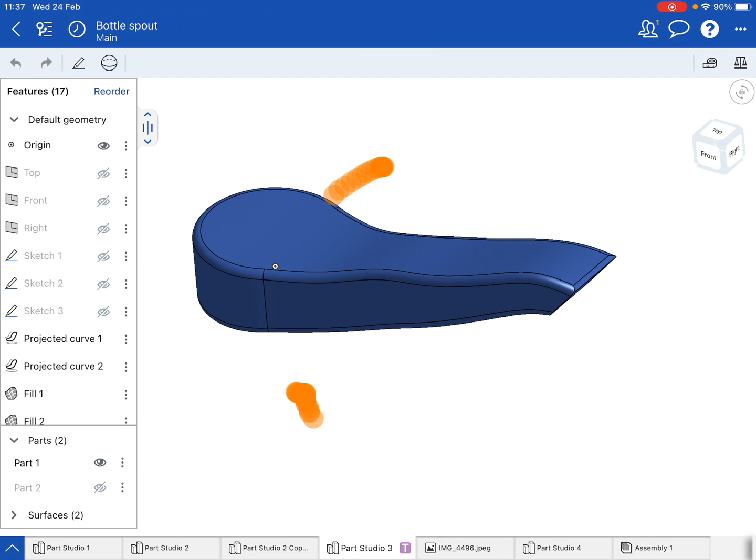For this recording, I want to look at how we can make a bottle spout using Onshape on an iPad. The method is slightly different to doing it on a PC, but hopefully it will work for us. It's going to involve projected curves, the fill tool, shelling, lofting, and hopefully a split as well, which sounds really exciting. So let's get started.

I'm basing the design on a bottle spout like this, the kind you'd see on a soap dispenser. So without further ado, let's start a new part studio for this.

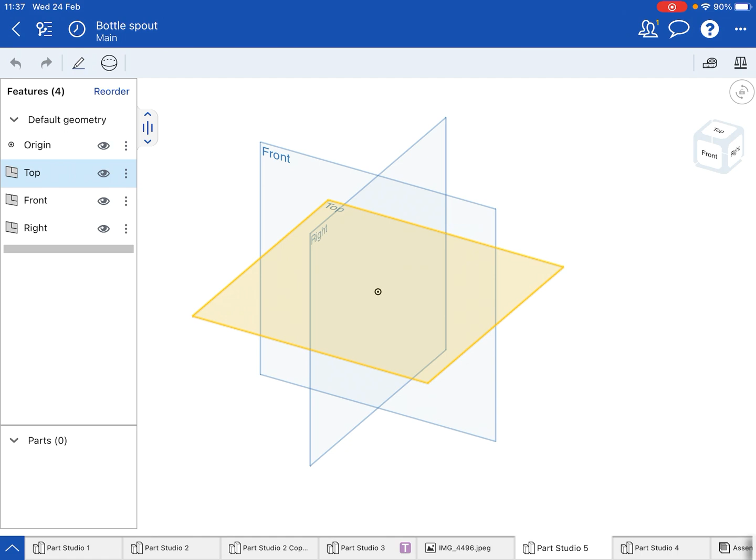I'm going to be drawing on the top work plane, so I'll select that, swing it around so I have it ready, and start a sketch on that work plane. I'll start off with a center point circle, starting from the origin, so I move my cross to the origin and drag the circle out about 25 millimeters.

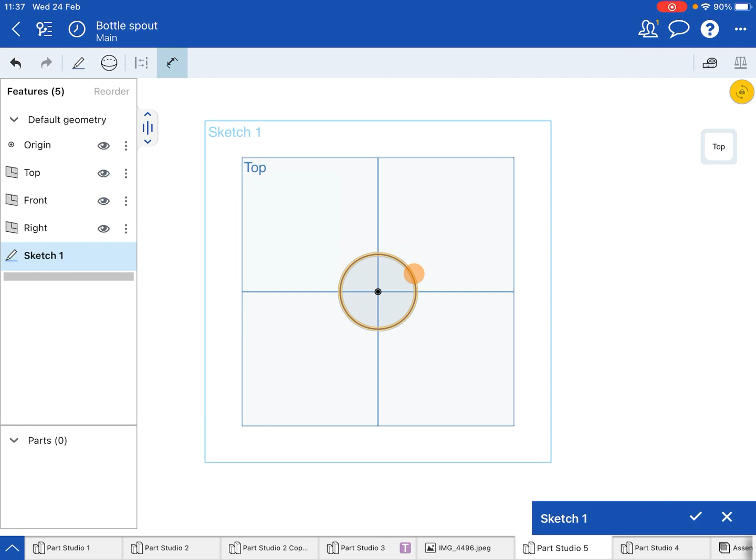Now, unlike the PC, you don't get the dimensions straight away, so you need to dimension it first. We can see this is on 41, we'll just change this to 25, and there we have it, and we can zoom in.

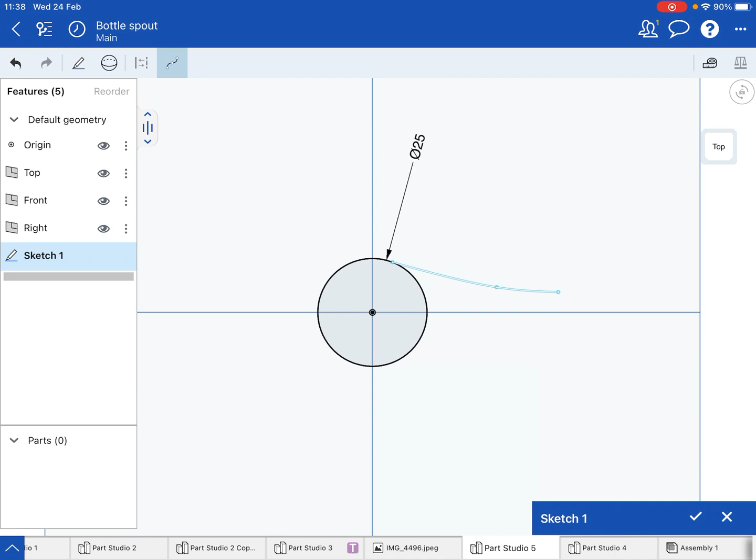Next, I need to get the spline tool. Now this is tricky, you need to start it from the edge of the circle. So I'm going to move my plus sign so I'm actually on the edge of the circle, so it's tangent, and then move to where I want the next point to be, and keep clicking until I get to the points there. You can go back and edit these, remember, but that's fine. Then when you finish, just deselect the spline tool.

If you want to edit this, I'd advise locking the screen first. I'd probably hide the work planes because they tend to interfere, so I'm just going to hide my work planes, then move my finger onto here and hold down until I get a cross sign. I can move onto a point, and then drag and move that point to where I want it. So hold down your finger, get the cross, get that selected, and you can move that point around on the screen. Right, let's double click to deselect that.

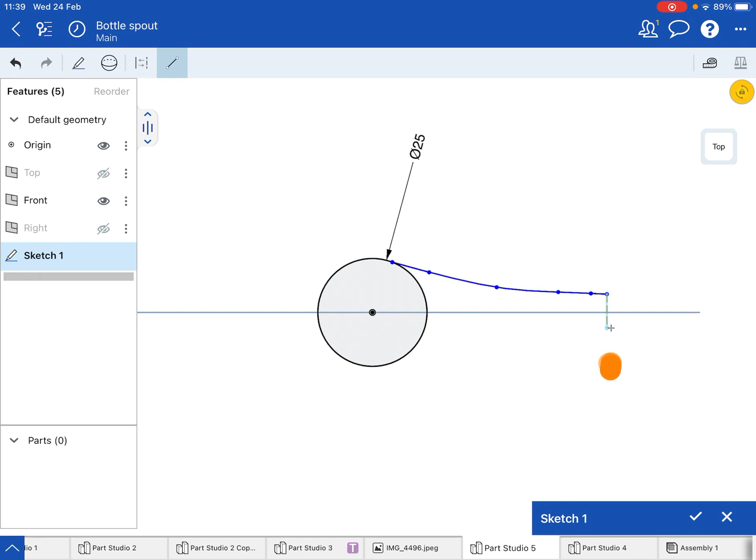I'm then going to put back my work planes just so I can see that again, because I need to see the center line here for the next part. I'm going to choose my line drawing tool, starting from the end of that part, and then drag that down to the edge of the front work plane that you can see there. So that's my drawing drawn out.

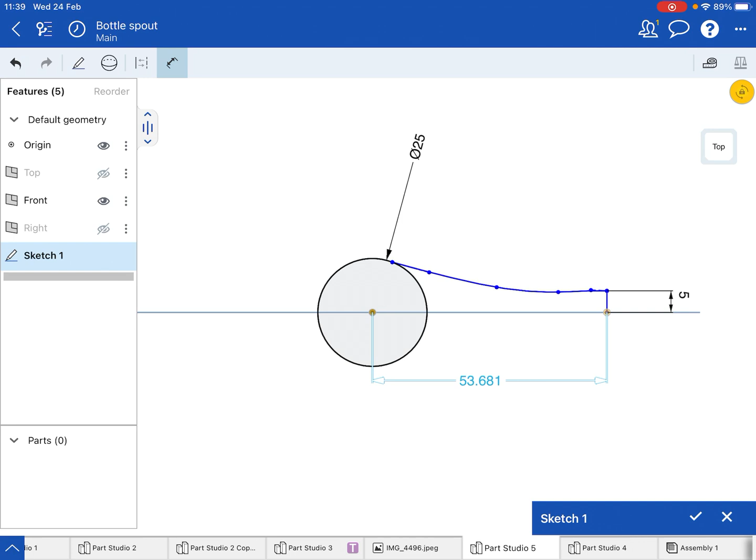Let's dimension this, so I'll take my dimension tool. I'm going to start with this end line here, that's right, and we'll make this 5 mil. We'll also do the dimension from this point to this point, drag that down, and make this 50 millimeters there, perfect. So we've got tangent happening from the circle, a line hanging out from it, and a 5 mil part there.

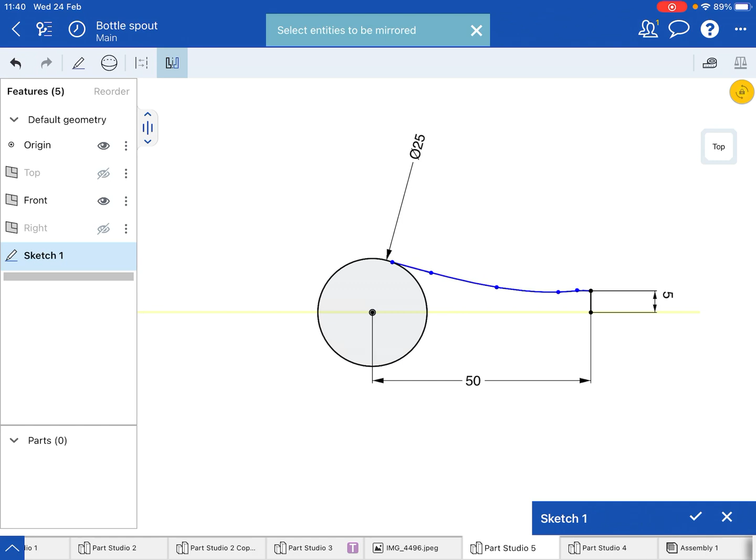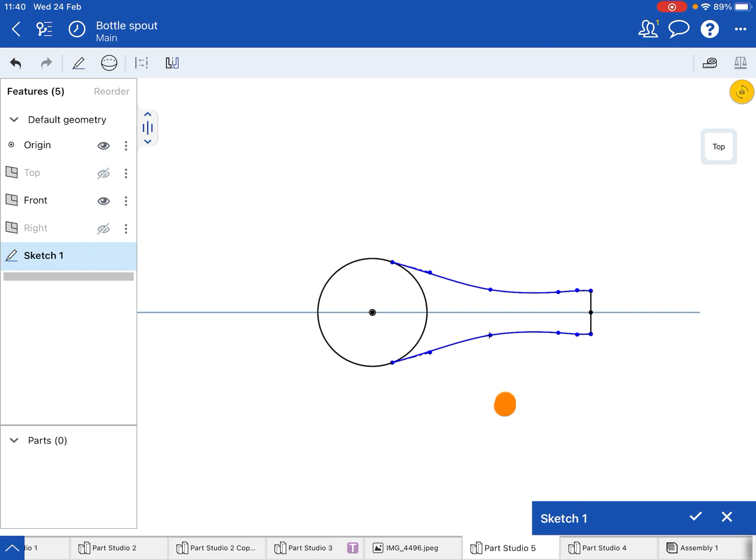Next, I'm going to use the mirror tool. I'll use the edge of the front plane as my mirror line, then select the entities to mirror, which is the spline I drew first, and the end piece as well. Now it's a complete shape because it's gone all grey for me. The reason the mirror tool is really handy is that you can pick up any point on this and move it around, and it will mirror across, so we can keep everything symmetrical on our shape, which is quite cool, as we try to design this.

Okay, so I'm happy with that sketch. One thing I'll do first is take the point tool and put a point on the end of that circle, the edge of the circle, and also on this edge here. This will enable me to see this when I'm looking at it from the front plane - those two points show me the extremities of my drawing.

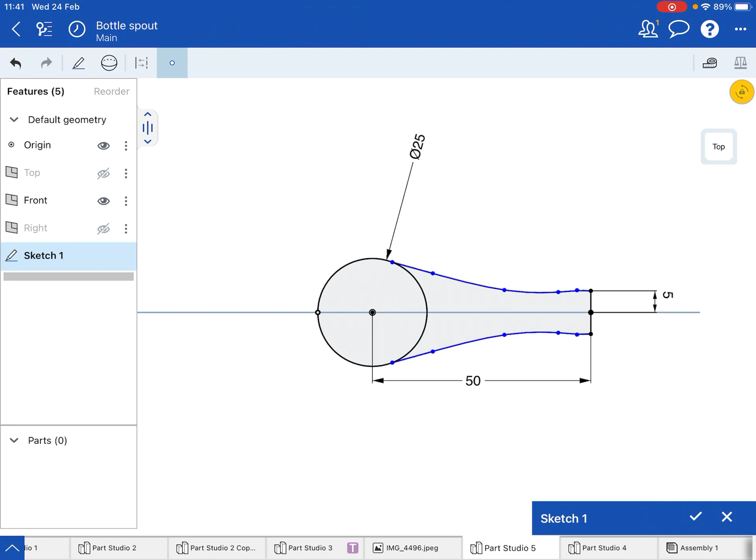I'm also going to take my trim tool and just trim the edge of that circle because I don't need that part now for my shape. That'll do nicely. Let's tick the sketch so we can see my shape nicely drawn out there.

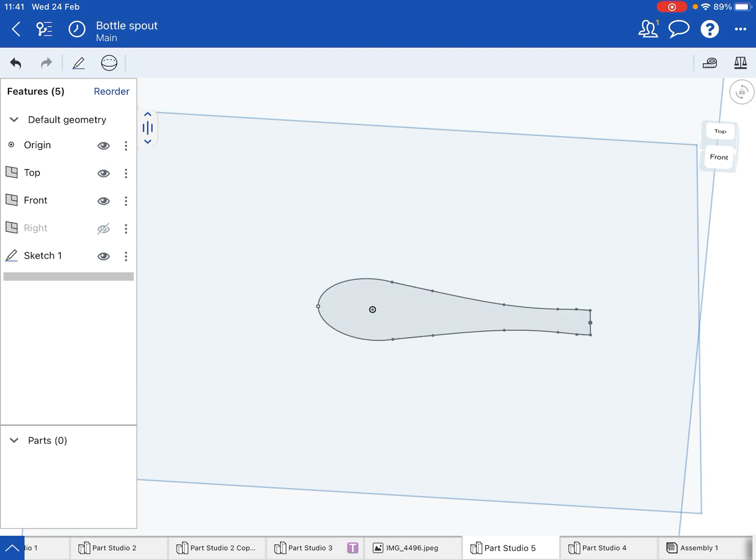I'm going to switch back on the edge of my top plane so I can see it, and then do a new sketch. This time it's going to be on the front work plane. Just double check - yes, it is on the front work plane. We'll swing this so we are looking at the front plane there. Brilliant.

So what we're going to be doing this time is drawing the spline the spout is going to be based on. I'm going to hide my front plane so it doesn't interfere, but I still want to see the edge of my top plane because this is going to be used as a reference. So choose my spline tool, and this is to draw the profile at the top of the spout.

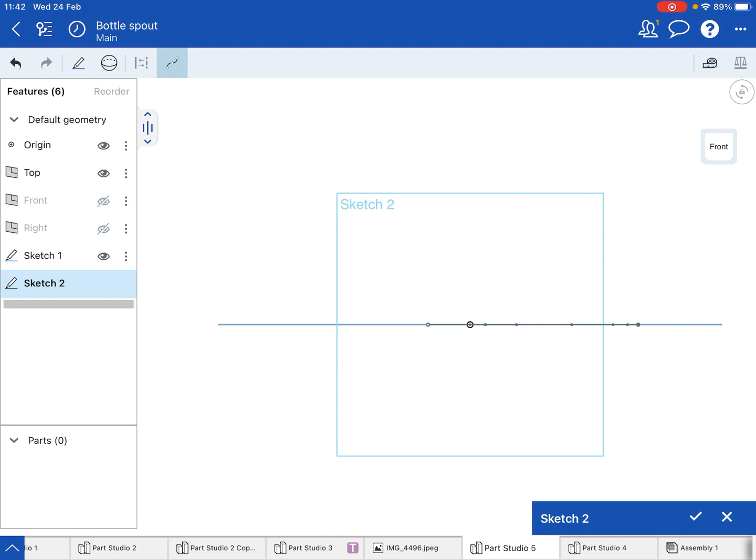So this is going to be a circular part, and then there'll be the edge of it. I'm going to start by just taking this up here. Now I'm going to start from here, but drag up so I can actually get the edge of that there, and then start to plot the edge of my curve that I want to go upwards.

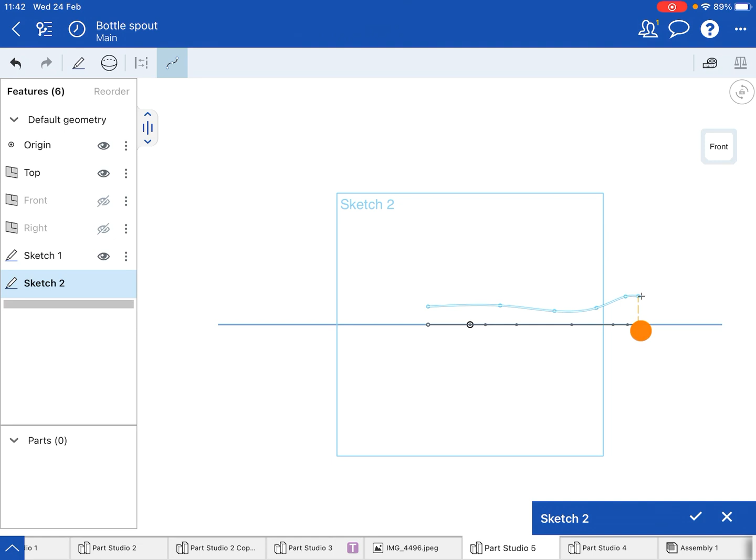When I get to the end of this, I'm going to take this so it hovers over that edge there, but then drag it up so I end up with the edge of it here. Bearing in mind I can move each of these points later on as well, so I know they are vertical with the edge of my shape there. I could draw a construction line to help this as well, but this will work for the minute.

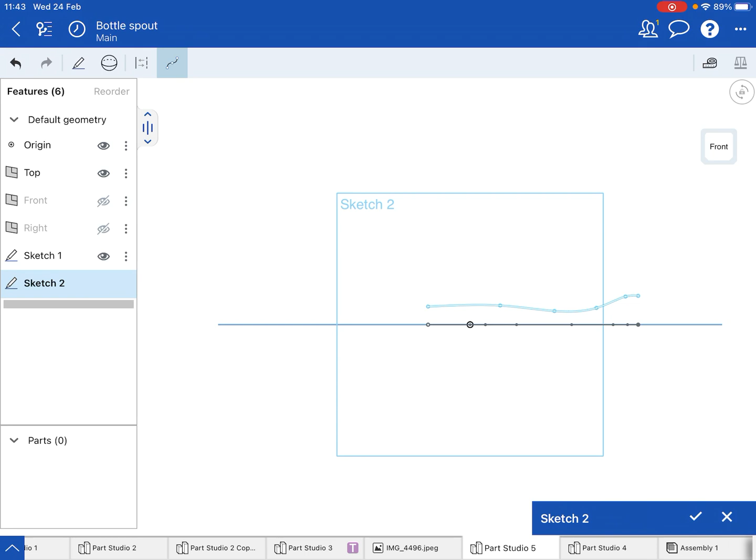I'm happy with the position of that spline, but I'm going to change some of the points. I've deselected the spline tool and I'm going to lock the screen, hold my finger here until I get the crosshairs, pick up this point here, for example, and just drag that up to move it to a better position for me - maybe starting to curve up. Double tap to deselect it.

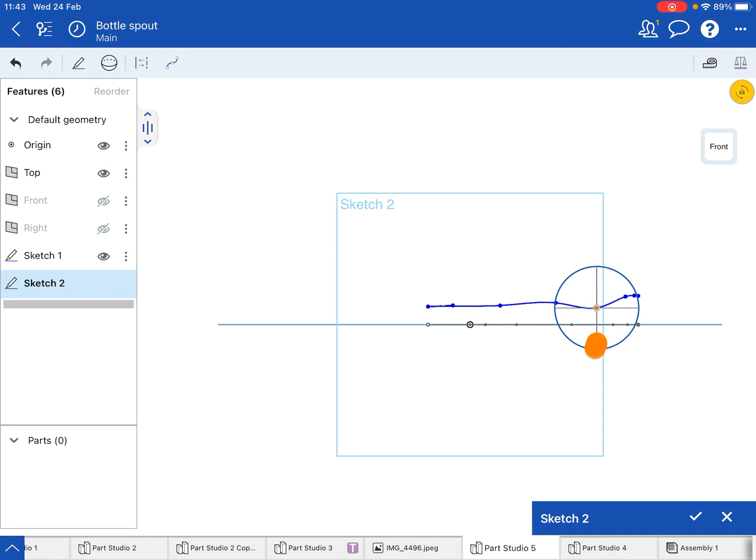Hold the finger down until I get the crosshairs, pick up this point here, and I should be able to move this point. There we are, there you go - just want to move that up. There we go. It's a little bit fiddlier on an iPad, but it does work. I'm happy with that, I'm going to green tick it.

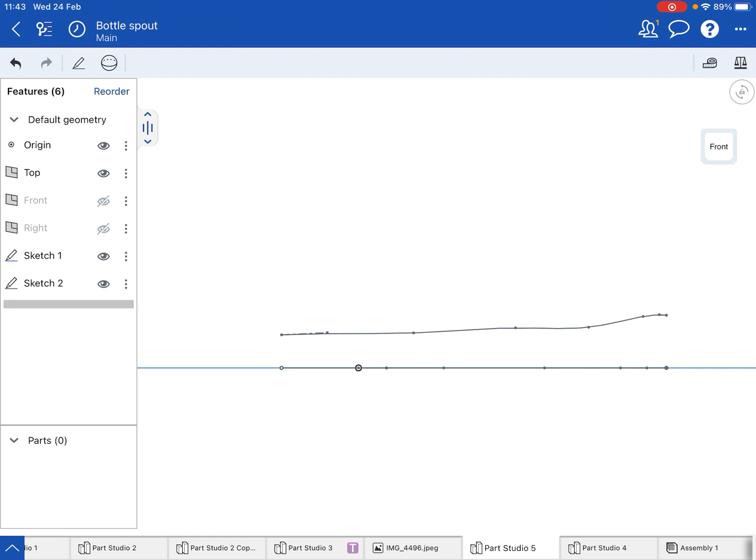Next spline I'm going to draw is going to be another sketch. So again, pick your sketch tool, select the surface you want to be on - this is going to be the front work plane. I'm going to pick my spline tool again, close that off, and this time this sketch is going to come through the shape here.

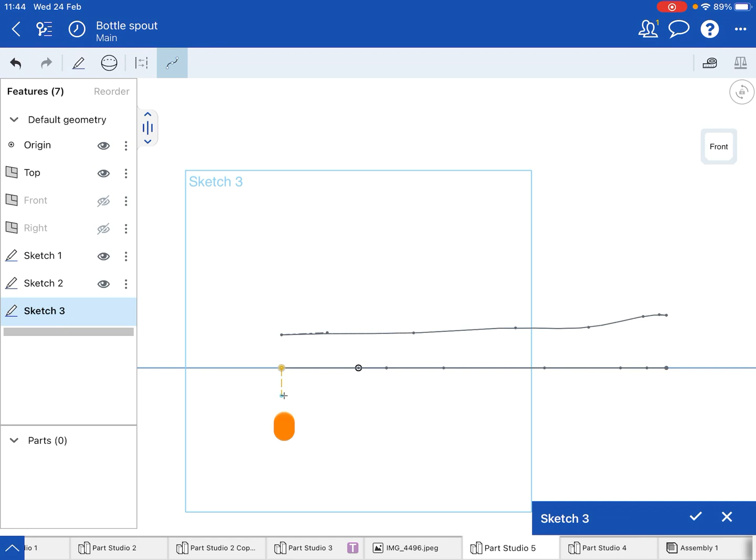So again, we're going to start with this spline from there - don't want to drag this down. Make sure you've got the orange dashed line there, and then start to actually plot the shape of this coming through. So maybe that comes through something like that.

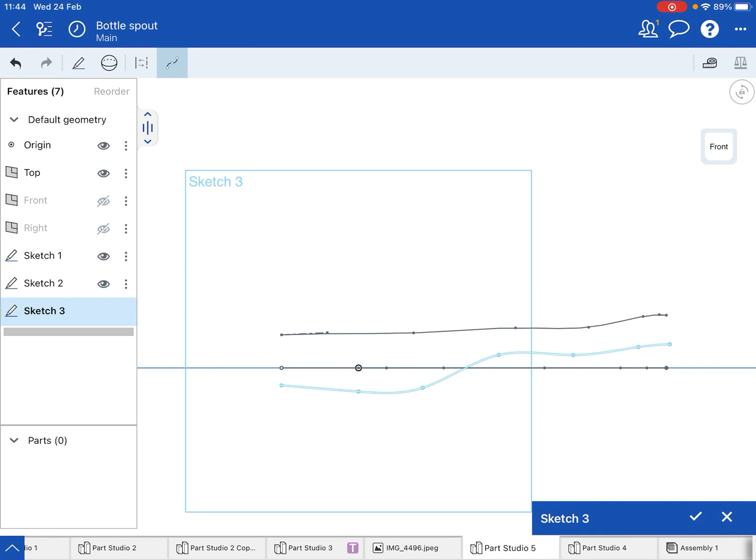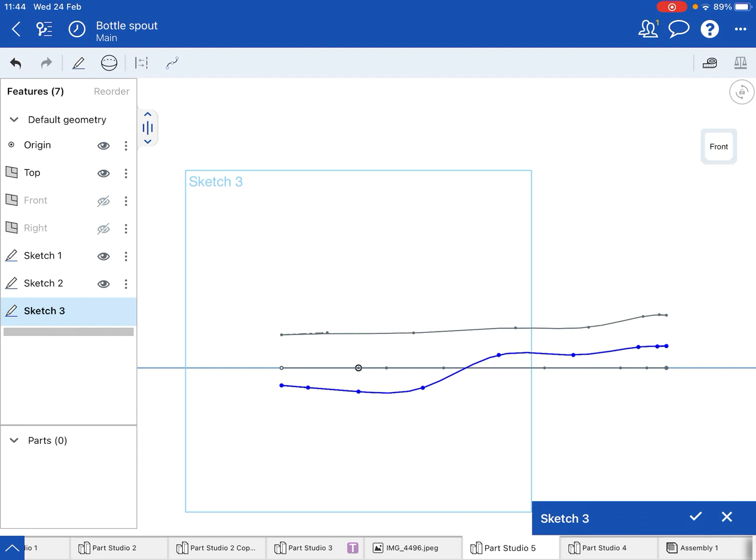Now, this line here is slightly odd, so I'm going to move this back. Let's take off the spline tool, because I overshot there slightly. Hold down on that, pick up the end of this, and drag it down so it's in line there. That's better, in line with the shape underneath. Double tap to deselect, pick up this tool here, this point, and move that. It is more difficult to do this. I'll leave it at that for the minute.

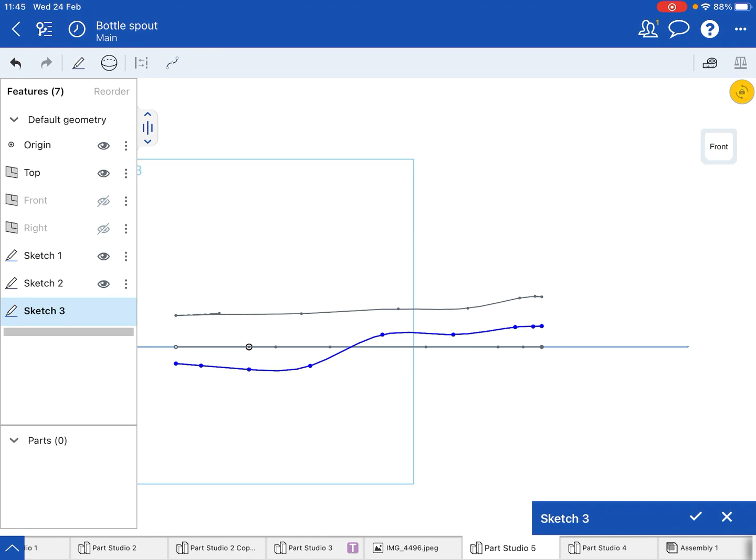Okay, so we've got our two splines drawn, and we have our profile drawn there as well. Green tick that. So now we should have two splines and a shape, an outline that we're going to be basing this on. The next thing we need to do is create our profile.

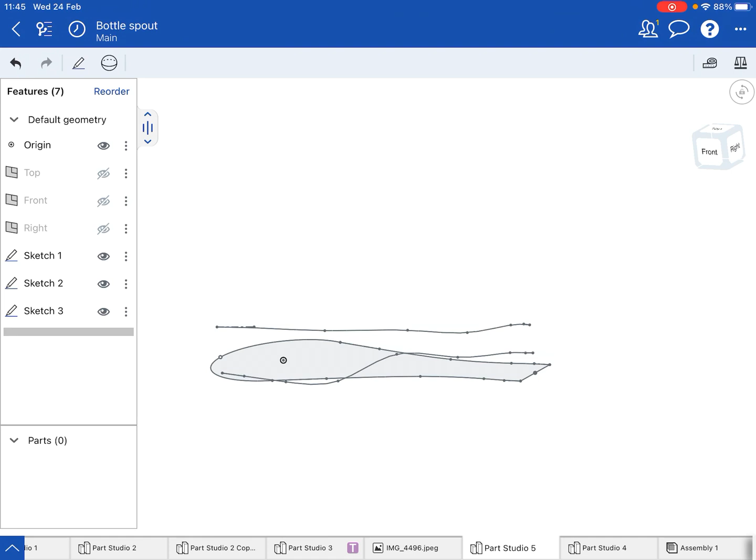So we're just going to hide the top plane for the moment, so that's out of the way. That's fine. I'm going to select one of the tools here, the projected curve.

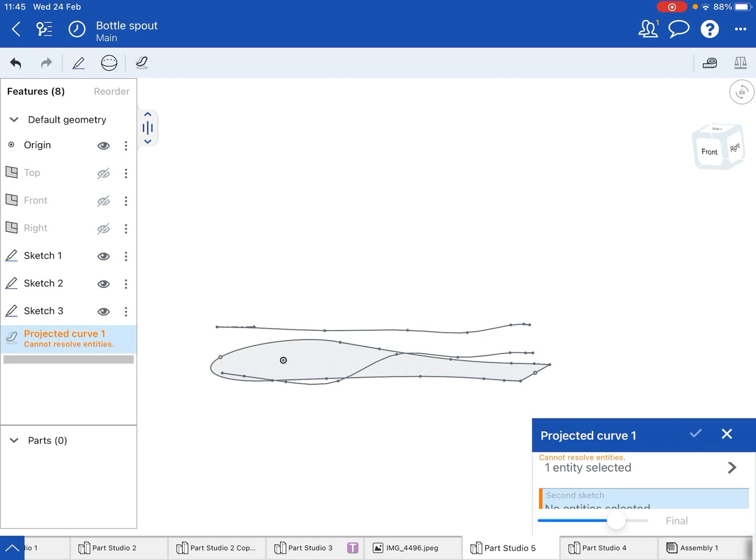Now, you have to pick two entities, one in one sketch, one in the other. For the first sketch, I'm going to pick one of the splines, make sure I pick up that. Then on the second sketch, make sure you select it so it turns blue. I'm going to select the perimeter of the other shape. You may want to zoom in so you really do pick up these parts, but you have to pick up all of them as you go around. And you can see that has created the profile of my projected curve there, which is fine.

Green tick that, that's one of them. Now that does automatically hide sketch two, so we need to switch that back again because we're going to use that for the second projected curve.

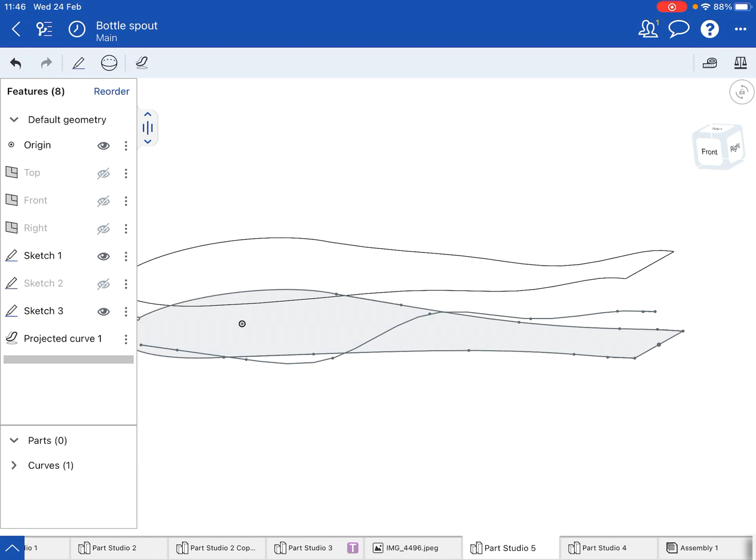So pick your projected curve tool again. The first entity, I'm going to pick up the second spline that I've got there. For the second entity, just scroll this up so we can see it. There we go, make sure you select that, and then again select the perimeter of our shape, making sure you select them all as you go around. There we are, okay, great.

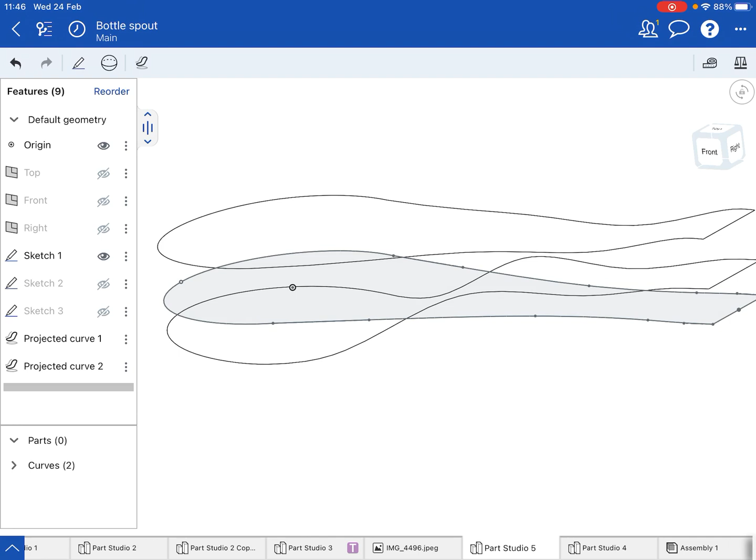And then tick that. So I should now have two outline shapes of my projected curve and an inner shape here. I can hide sketch one because I don't need that anymore. So I've got two projected curves, which gives me some interesting shapes to work with.

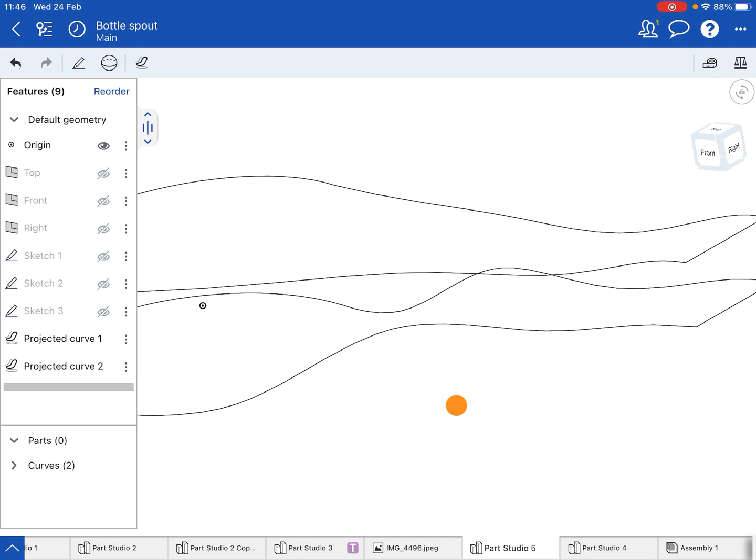I'm going to now pick my fill tool. I'm going to select one of the projected curves, so that's filled. Green tick that. And then fill tool again and select the other projected curve, so that's filled. There we have it, interesting two shapes there.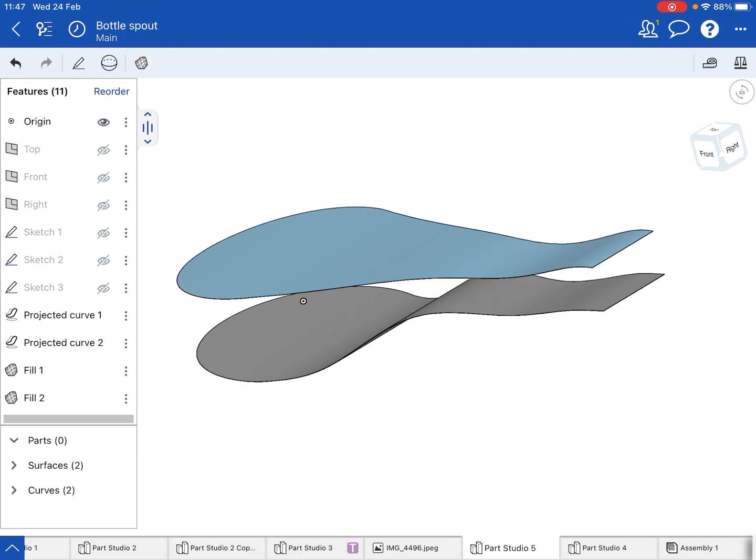Now, to make this into a solid, what we're going to use is the lofting tool. Click on the tool, pick the lofting tool, pick the first shape and then the second shape, and that should loft between the two shapes there. So that's created a 3D lofted shape. I'm happy with that, so I'm going to green tick that.

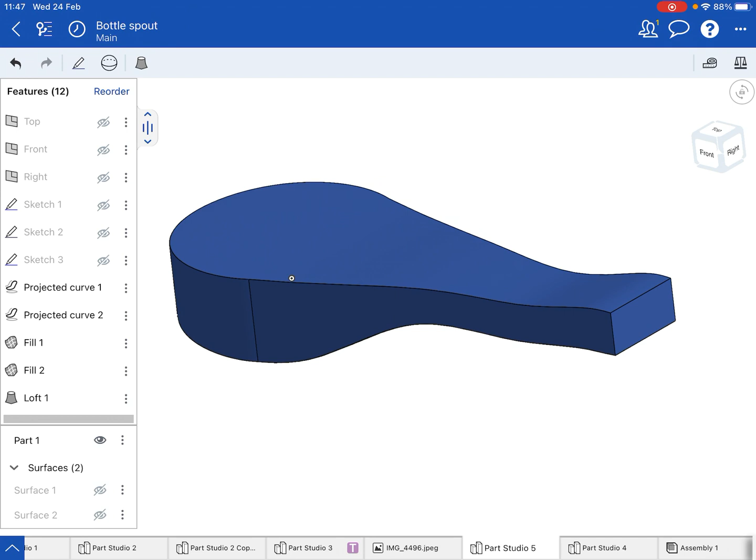Now you can see here it's got this zebra print happening on the top. That's because the solid is breaking through the top surface there, and we don't need those surfaces, so we can hide those. On the left hand side in the parts panel, you'll see there are parts and then surfaces. We can hide those surfaces now since we don't need them, leaving just part one showing.

Okay, cool. So next we need to hollow out our shape. I'm going to go to my tools again, pick the shell tool, pick the front end of the spout, and you can see it's created a little letterbox there. Let's make that a bit better. We're going to change the shell thickness to 0.5 mil, and now we have a nice shell of our shape going through there.

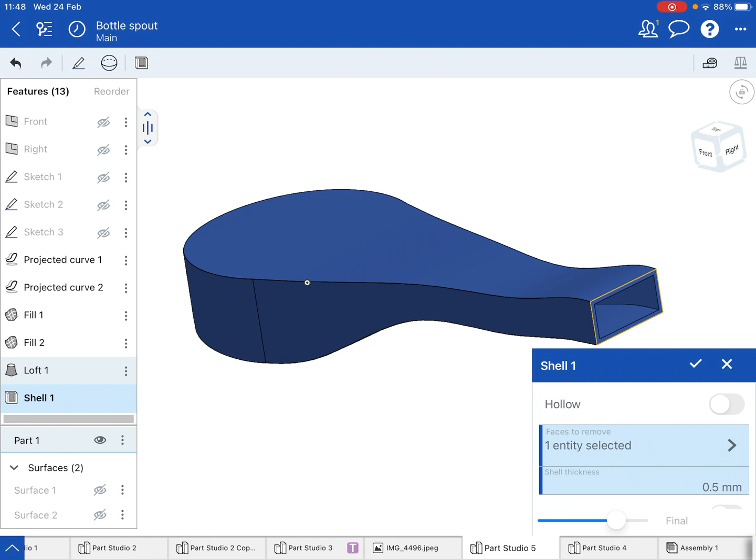I'm happy with that, all right, green tick that. Okay, and let's actually round off some edges as well.

So we'll take the fillet tool, and we'll just fillet around here. Now by default this will be 5 mil. You will probably want to take this down to 1 mil, and then select the edges that you want to round off.

So I'm going to take the top edge here. Yeah, take that, there you go. That's right, we'll take the top edge of this one here, the edge of this shape, and the edge of that shape.

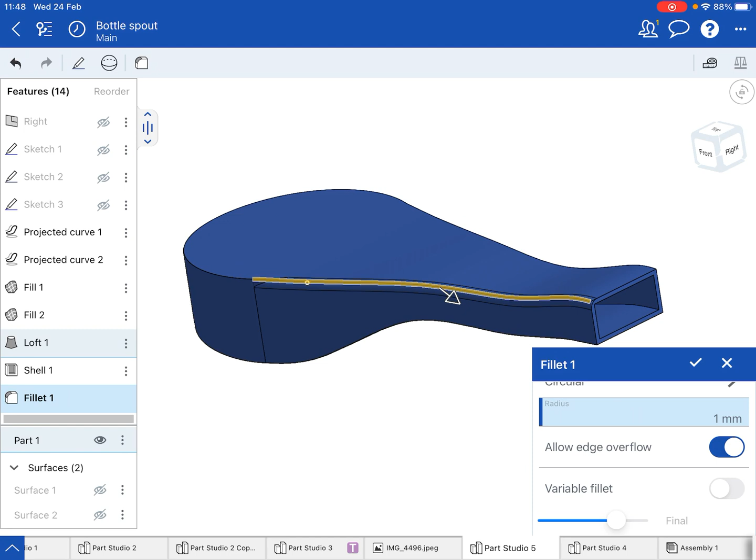I might need to rotate this around to actually be able to pick it up. Yes, there we are, okay, that's worked. I'll do the underside as well, so we may have to just rotate this around, pick the underside. Yeah, there you go, that's right. And that edge there, and we'll pick up that edge there.

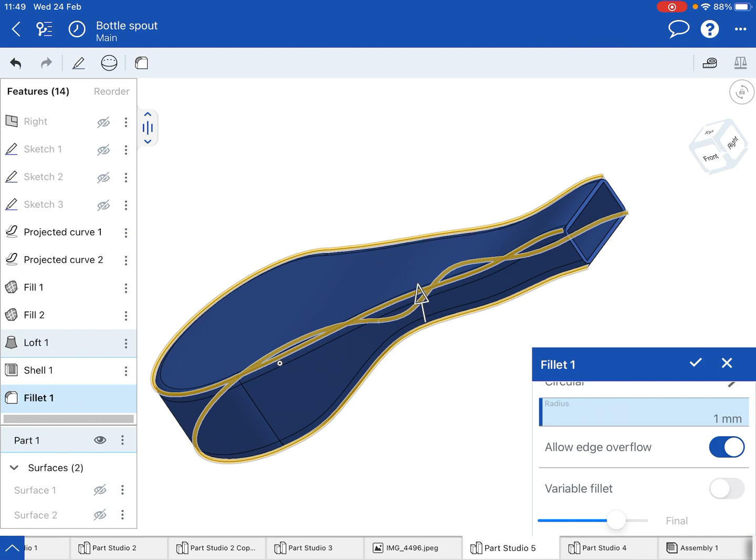On the iPad, you do need to sort of just rotate things around sometimes to pick up the edges there. So that should be nicely rounded off. Okay, let's tick that and have a look at it.

Yeah, that's beginning to look quite spouty for me. Now you can see there is a black line going around it. That's the profile of the curve that was used, and if you want to lose that, you just slide up here and go to curves, and then you can hide the curves as well, so that hides out the way.

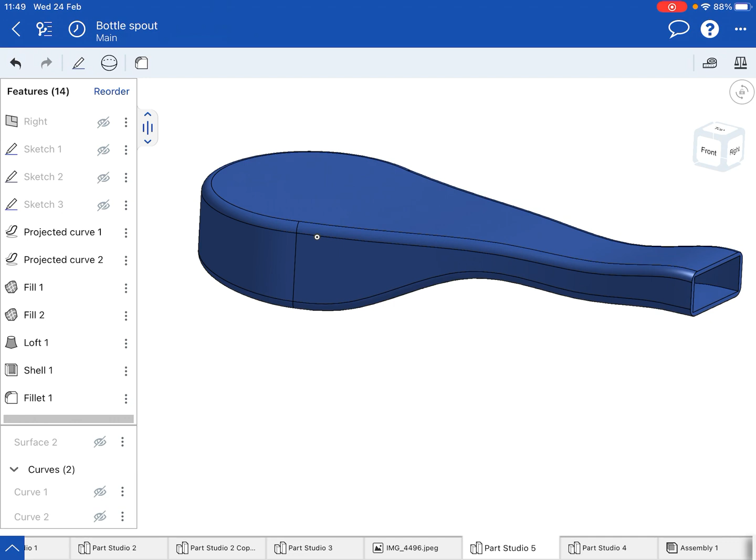Okay, now if we go back to our image though, we can see the image has a bit of an angle happening on the spout. So let's see if we can actually put that in place.

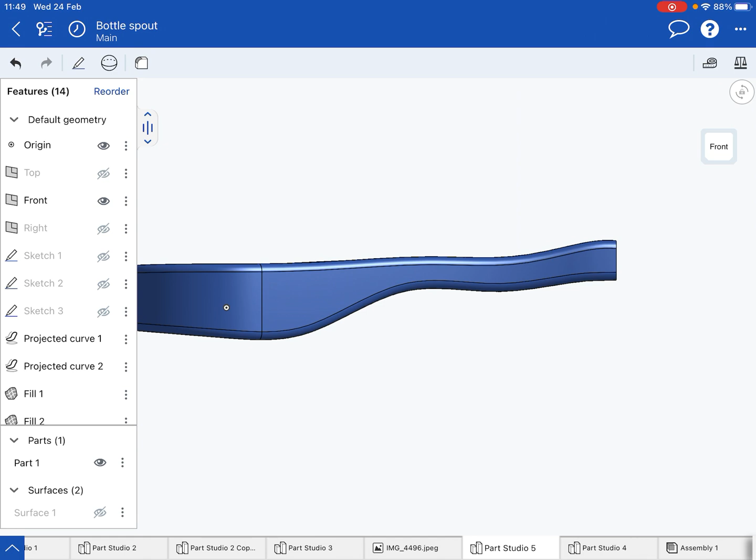So what we're going to do is go back to our front plane. I'm going to make sure that front plane is visible and swing to our front plane. Okay, right, there we are. So what we're going to do, we're going to draw a line going across the spout to try and angle it. So I'm going to take a new sketch that's going to be on the front plane.

Okay, I'm going to take my line drawing tool. I'm going to start this about there and take that through like so. Okay, so I've got a line going through it. I'm happy with the angle on that, that's fine. I'm going to tick that off.

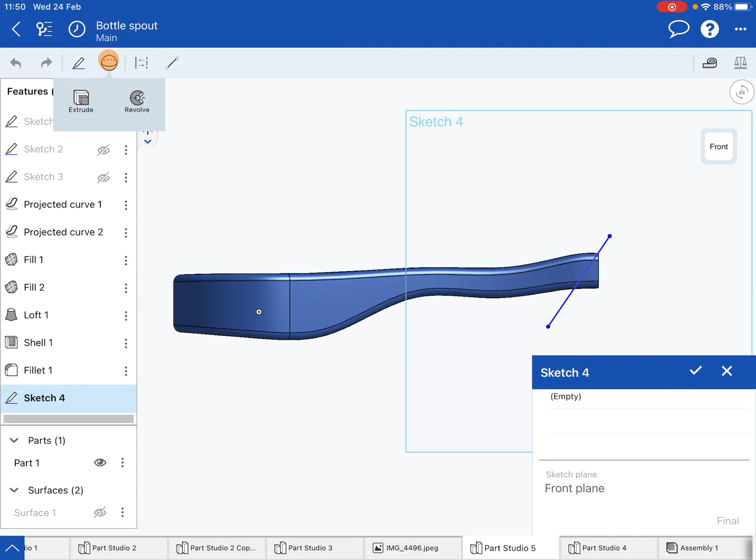In fact, actually, I'll go back into that sketch, because what we'll do, we will go to our extrusion tool, which is live. There we are. And that shape is going to be the one that we're going to be selecting, but we're going to select it as a surface. So make sure you click surface and select the line.

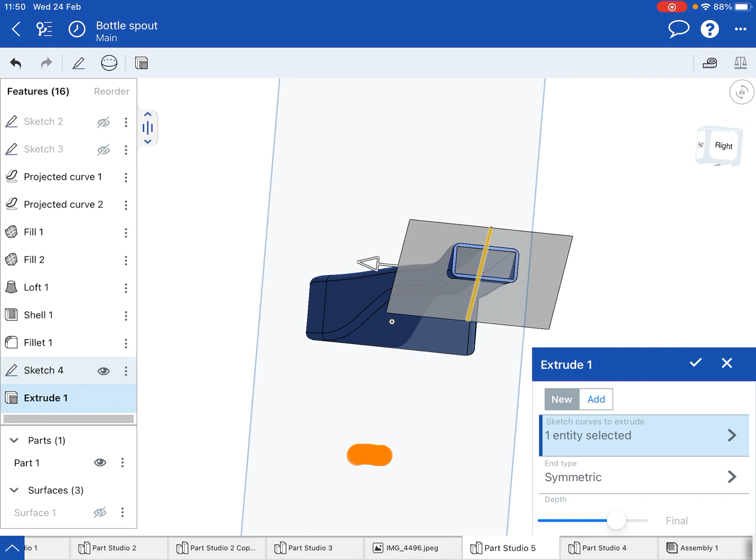Now, by default, it will start from that line and go out in one direction, but we can scroll up here and say, instead of blind, we're going to go symmetrical. There we go, and that is now sliced all the way through our shape. So it's like putting a knife through the shape there. Okay, so green tick that.

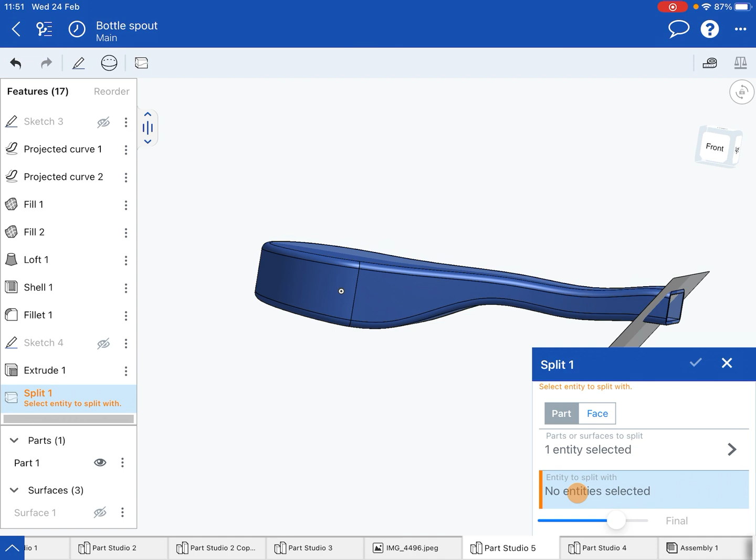Now, we can then use another tool, which is called the split tool. So go to your tools here, find split part there. It asks you what entity you want to split. Well, we want to split the part one, so we can select that. Then it says which entity to split with, so click on that, click on the surface that we've just created there.

Okay, so we've got those two parts. We've used a part and we've used a surface to split them. And you'll notice that in the menu at the side here, it now says there are two parts, part one and part two. So we've taken the original part and created two new parts. Okay, green tick that.

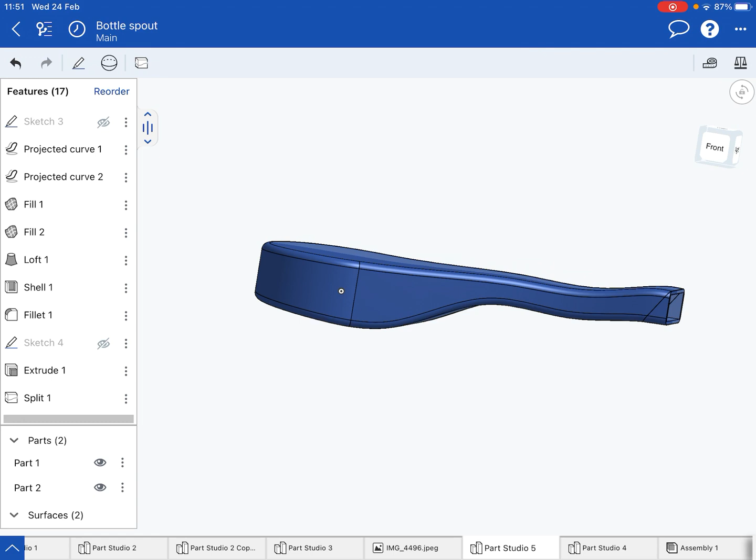So now you should see that there is a line on this that is our split line. Okay, so I'm going to hide part 2. There we are. So we hide that, and now we have an angle to our spout created. That works out quite nicely as our shape. Okay, cool. Right, let's see what you can create with that.